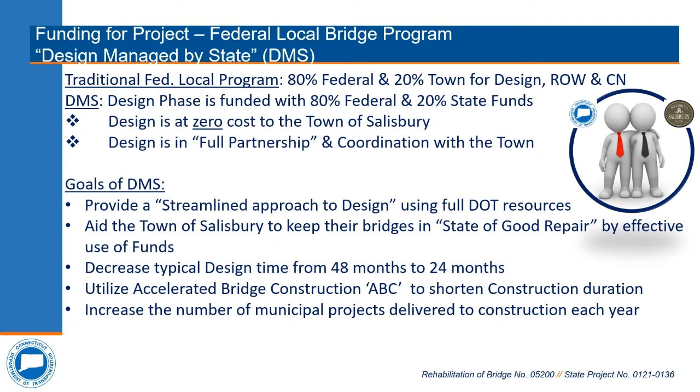Hello and good evening, everyone. For those who don't know me, I'm Curtis Rand, the first selectman in Salisbury. As you may know, the Connecticut DOT every two years inspects bridges for defects, and the Salmon Kill Bridge was flagged as one in our town needing repairs. We knew the bridge needed to be rehabilitated, and we were looking for the most efficient way to proceed and stay within the guidelines of the allocated bond money.

Traditionally, we would have selected and hired a consultant to develop the design, who would be responsible for navigating through the design process, with the town covering 20% of the design costs. As Preeti mentioned, the DOT offered the DMS program, Design Managed by the State, and we felt that it was a good thing for the town since the state pre-selected consultants and would have better knowledge of the design process, resulting in both earlier completion of design and construction, not to mention cost savings to the town.

We started meeting with the state in the spring of 2018 to get an understanding of how the program worked and how it may benefit the town. After several more meetings with the state, the town recognized that this program would be a good joint effort, and we agreed to go forward with it. They have kept us in the loop at all aspects, and they've provided technical alternatives and recommendations, and they have informed us that the town will be making the final decision on all aspects. The process has been followed diligently, and we thank the department for partnering with us on fixing our infrastructure.

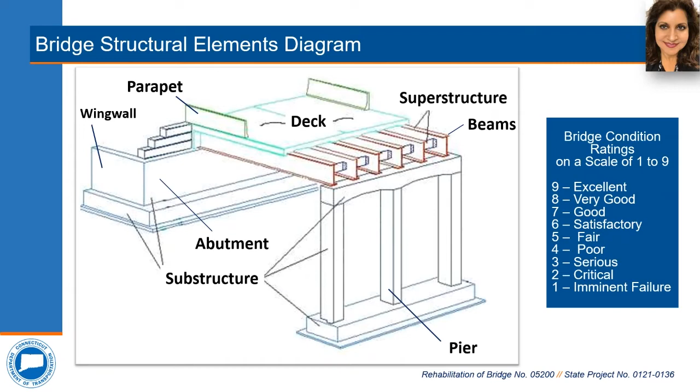Thank you, Preeti. Good evening, everyone. I am Danielle Foucher with Close Jensen and Miller, and I will be presenting the project 121-136 Bridge 5200, which is Salmon Kill Road over Salmon Creek in Salisbury, Connecticut.

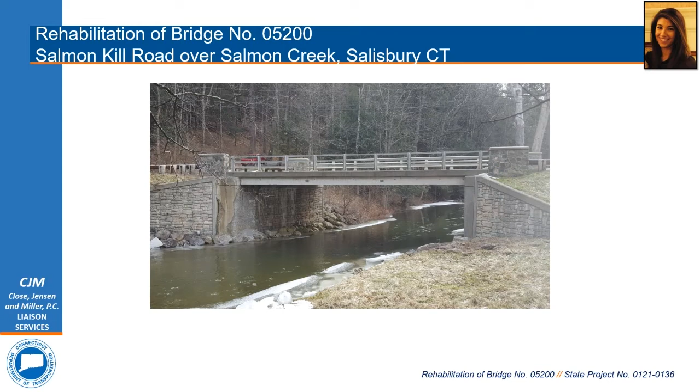The project site is located approximately a half a mile east of State Route 112, or Lime Rock Road, in the town of Salisbury.

Here is an aerial view of the project site. As you can see, the bridge is located within a rural area, and there are driveways located on both the southeast and southwest corners of the bridge.

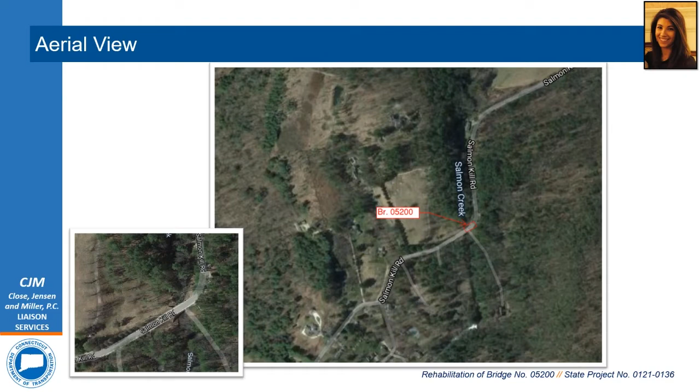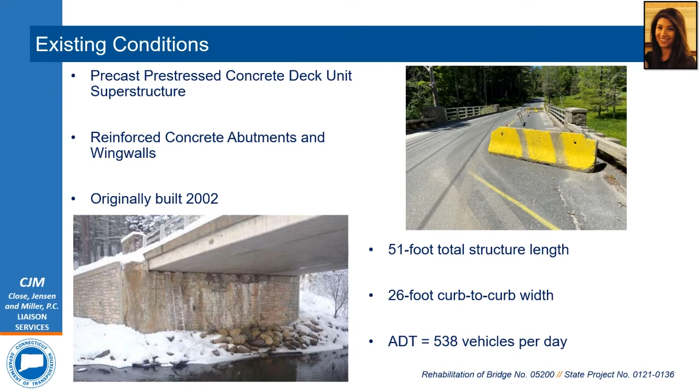The existing bridge was constructed in 2002 and consists of a precast, pre-stressed concrete deck unit superstructure supported by reinforced concrete abutments. The structure has an overall length of 51 feet and a curb-to-curb width of 26 feet. The current ADT is 538 vehicles per day per the last inspection report. I also want to mention that the westbound lane has been closed since January of 2020 due to the condition of the bridge.

The existing deck is in good condition with a rating of a 7. At each deck end, there are transverse cracks up to 3.5 inches wide with signs of active leakage on the superstructure below.

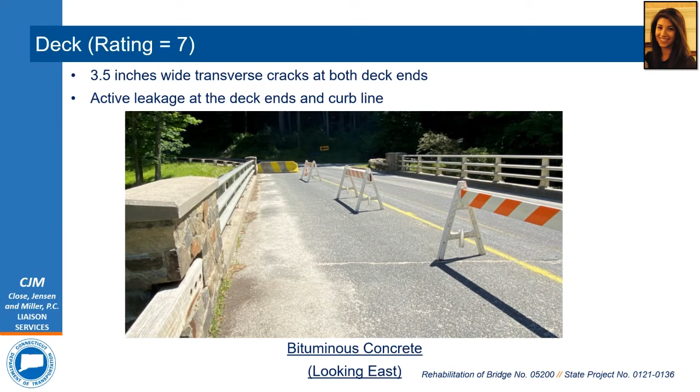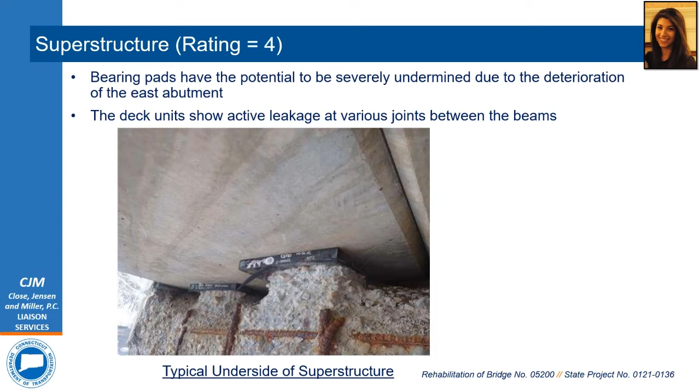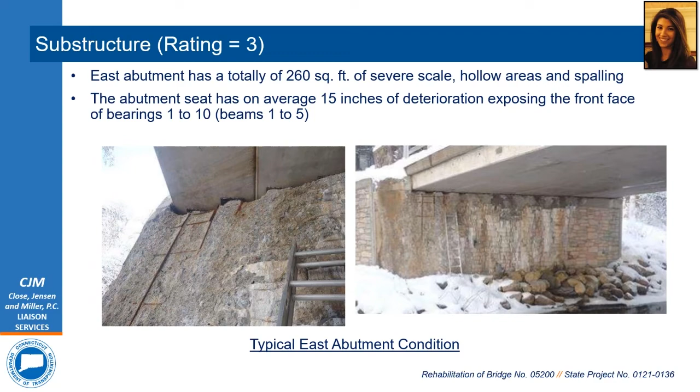The existing substructure is in serious condition with a rating of a 3. The east abutment has a total of 260 square feet of severe scale, spalling, and hollow areas. As you can see in the photos, the abutment seat has an average of 15 inches of deterioration, exposing the front face of bearings 1 through 10, or beams 1 through 5 out of 7. Here are a few more photos of the deterioration of the east abutment.

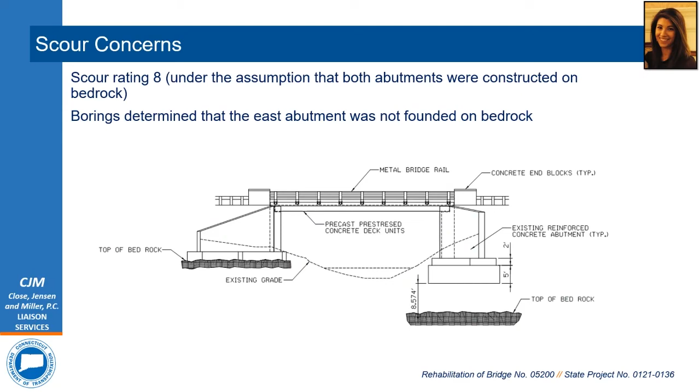Based on the most recent inspection report, the scour rating was reported as an 8. This rating was based on the 2002 scour report that assumed both abutments were founded on bedrock. However, after conducting borings, it was determined that the east abutment was located approximately 8.5 feet above bedrock. Therefore, there are some scour concerns associated with this bridge.

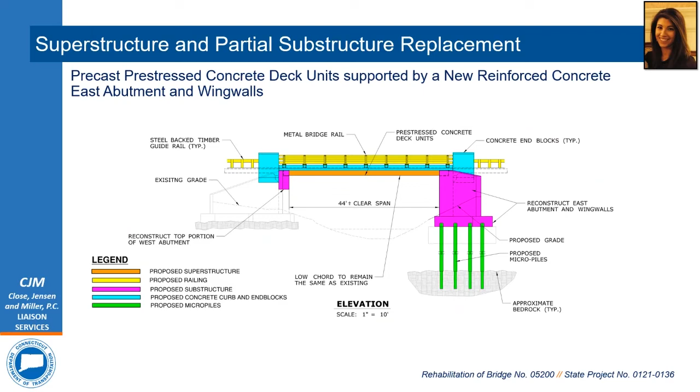The proposed project will consist of a superstructure replacement with a partial substructure replacement. The proposed superstructure will be comprised of precast, pre-stressed concrete deck units and supported by a new east abutment and wing walls. The new abutment and wing walls will be comprised of reinforced concrete and supported by micropiles. The existing west abutment cap will be reconstructed to support the new proposed superstructure, and the existing channel will be maintained.

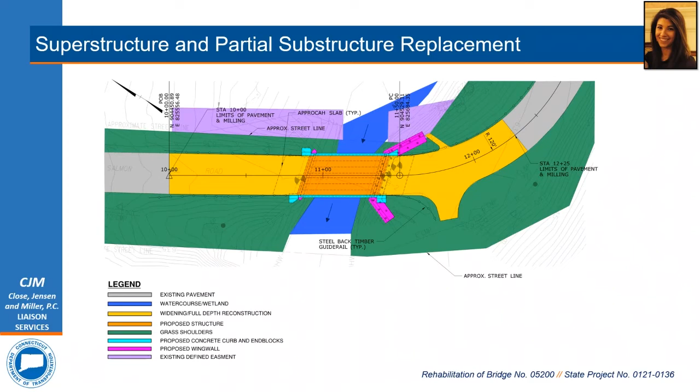Shown here is a plan view of the project site. Shown in orange are the limits of the proposed bridge, and shown in yellow are the limits of the full depth roadway reconstruction. All construction activities will be performed within the existing right-of-way, shown in green, and defined easements, shown in purple.

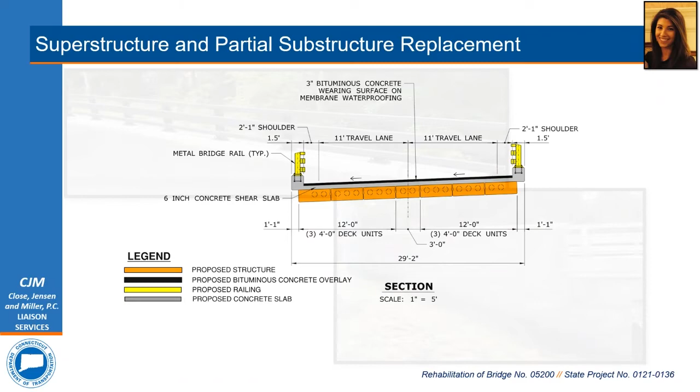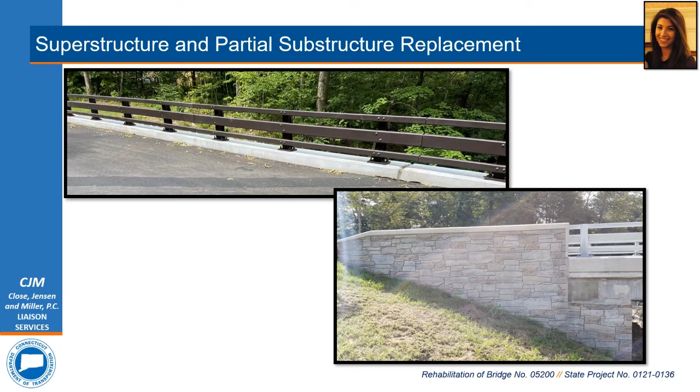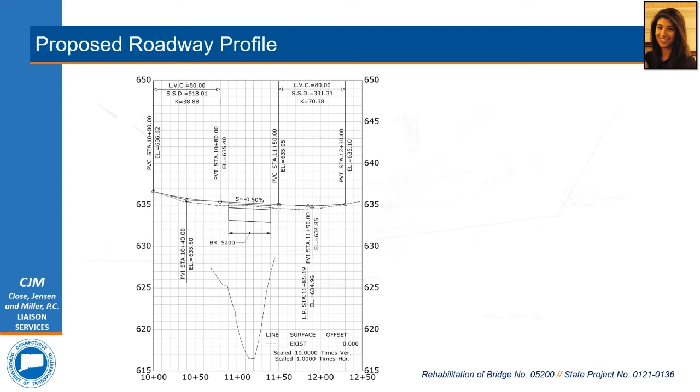The only utilities found within the project site are overhead utilities. CJM will coordinate with all utility companies, and all relocations will be done prior to the start of construction so that there are no delays.

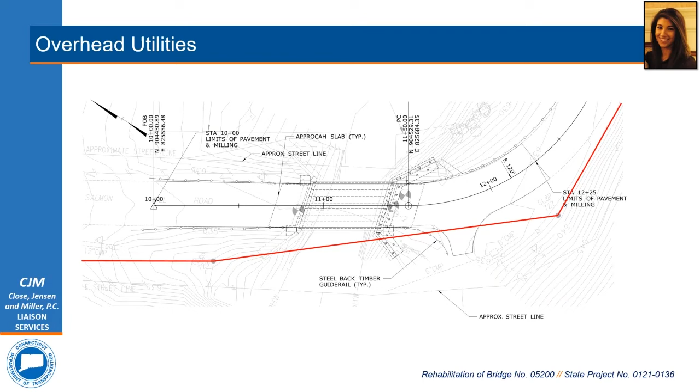A detour will be utilized during the duration of construction that will be in effect for approximately 6 months. The detour route will be about 5 miles and utilize both state and local roads. Access to all adjacent properties will be maintained throughout construction, and all EMS, school buses, postal services, and all other town services will be informed of the detour at least 2 weeks in advance.